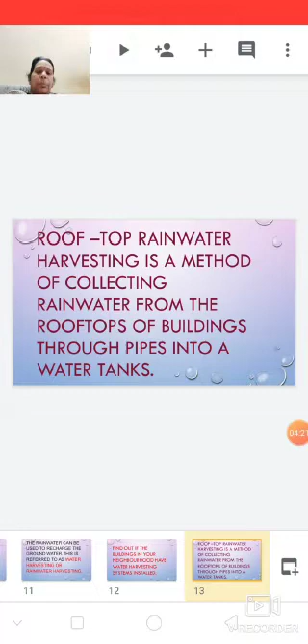Rooftop rainwater harvesting is one of the methods by which we collect the rainwater from the roofs of the building through pipes, and this pipe is led into the water tank, which can later on be filtered by simple methods for the further use of the water.

This collected water is stored as underground water within the pits that are there, and we can recharge this groundwater later on. The pits and tanks made in low-lying areas collect this rainwater, and the water can now be filtered and disinfected for consumption.

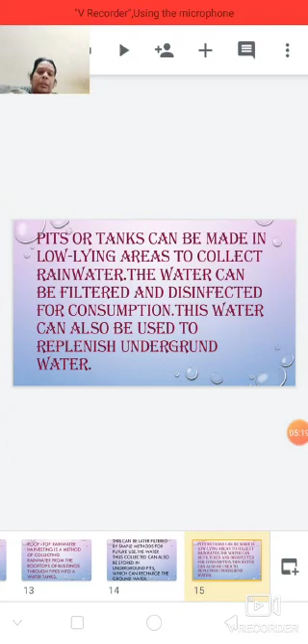This water which is consumed can be used up whenever we require. The water can also be used to replenish our groundwater, that is your underground water. Even the level of the water table can be increased in our area with the help of this method.

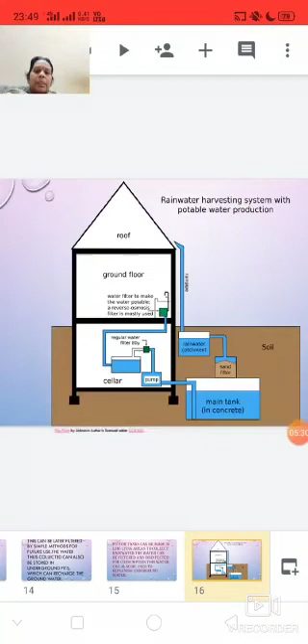Here you can see in the picture, this is a triangular roof. From one of the sides we can collect the water with the help of pipes, and this water can later be used as potable water.

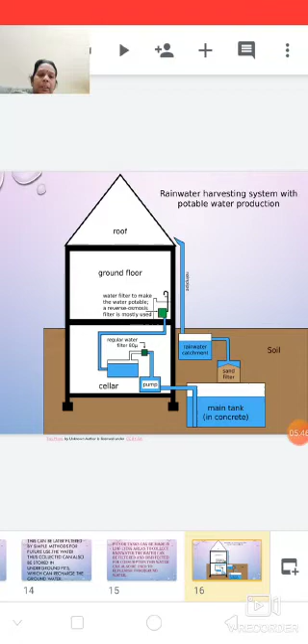Water is collected within the ground. From there, the water is carried to the tank and then it is filtered and again pumped and utilized. Then we have this type of building in our area.

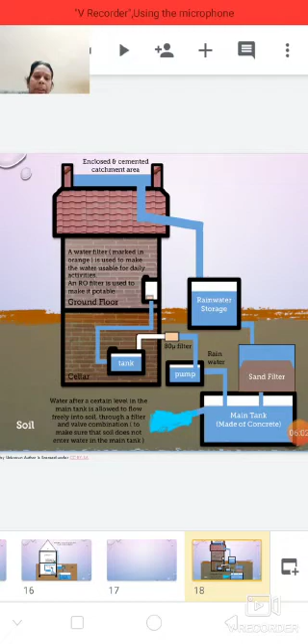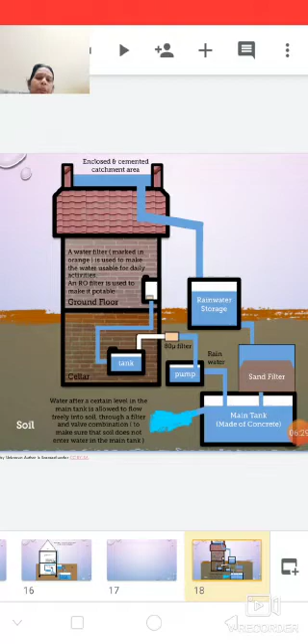Here the water is collected from the terrace. That water is carried into a storage, either a reservoir. From there it is again carried to a tank which is filtered in between. This filtered water is later made insect-free, either disinfected, and then it is brought to a tank, from which it is pumped to our house according to our consumption.

So we saw that here we are using rainwater. There is one more way of conserving rainwater which was practiced in olden days. Nowadays it is still there in some states of India, but it is not practiced at a vast rate.

We have, at many places in India, an old age practice of water storage which we call Baoris. Bowery was the traditional way of collecting rainwater, done with the help of wells that were dug, these pits in the form of a tank, with stairs, and people used to draw water at the time of their requirement.